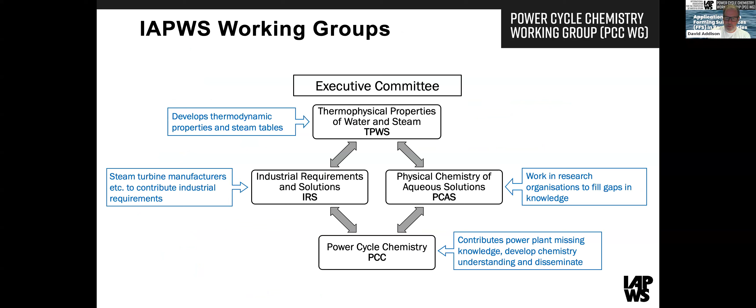IAPWS has an executive committee, and then there are four working group parts: physical properties of water and steam, which is where steam tables have come from; industrial requirements and solutions, related more to steam turbines and industrial manufacturers; physical chemistry of aqueous solutions, which is the main research part of IAPWS; and then power cycle chemistry, the application and practical side, which is where this webinar has come from.

If you work in a power plant, you've used IAPWS, because that's where the steam tables came from. Every power plant in the world, any plant that uses steam, is anchored in IAPWS publications and information. For the Power Cycle Chemistry Group, if you go to the IAPWS website, you can find a description of PCC.

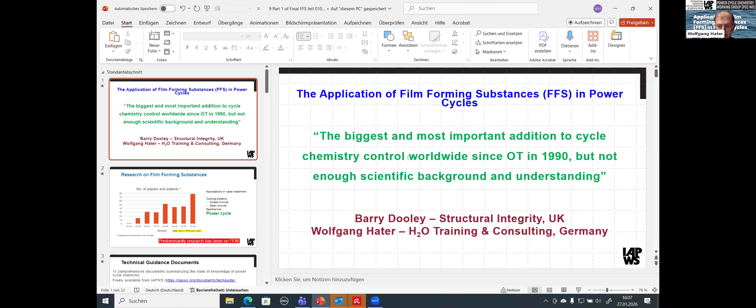Welcome also from my side to our webinar on the application of film-forming substances in power cycles. Barry and I, when we prepared this webinar, agreed upon the position that the film-forming amine technology, or more generally the film-forming substance technology, is the most important addition to cycle chemistry in many years.

But we also agree that there is a lack of scientific background and understanding. So the practical application is already, for some years, ahead of the science. Is this a new technology? No. The first papers or patents were published already back in the 1940s, and since then a lot of know-how has been developed that is officially available.

There are several applications in water treatment - cooling systems, geothermal, and what is the subject of today, power cycle chemistry. There's one point which is a little bit difficult: there's hardly any publication or scientific paper on the non-disclosed film-forming substances.

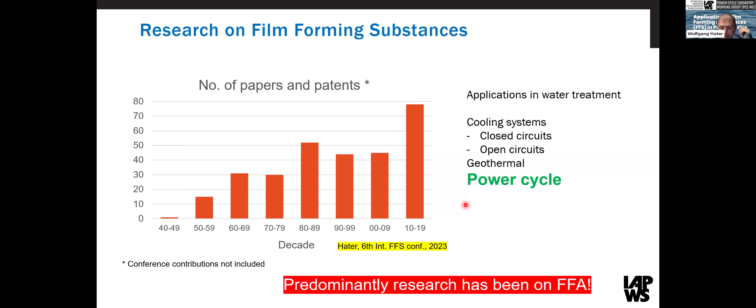So if you want a comprehensive view and summary of the knowledge about film-forming substances and their application in power cycle chemistry, I can only recommend you go to the IAPWS homepage and download the two international technical guidance documents on the application of film-forming substances, either in fossil combined cycle and biomass power plants, or in industrial plants. They give you an excellent overview of the technology, a comprehensive literature list, and guide you through all the questions you have to ask.

I would also like to mention that IAPWS is developing a certified research need document that will be published soon. The intention is to make a list of scientific gaps that should be closed for both FFA and FFP.

In recent years there has been a tremendous amount of activity dealing with film-forming substances - numerous plant assessments, various case studies reported, and application instances worldwide. Importantly, there have been 7 international conferences dealing only with film-forming substances, showing the general interest in this technology.

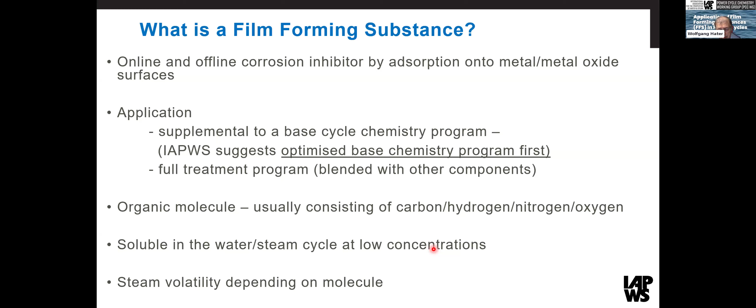When we originally started working on the TGDs, we had a big mess of names - this name, then film-forming amine, polyamine, fatty amine, surface active agent, and so on. So the IAPWS decided to introduce a nomenclature which is now getting more and more internationally accepted because it creates clarity, so we now know what we are talking about. There was an important distinction between the molecule itself and the commercial product that you apply in your plant.

Of course, the commercial product - one part of it is the film-forming substance. This is differentiated between film-forming amines, which are three very well-known molecules that are disclosed and where the properties are publicly available, and non-disclosed molecules, which we call film-forming products.

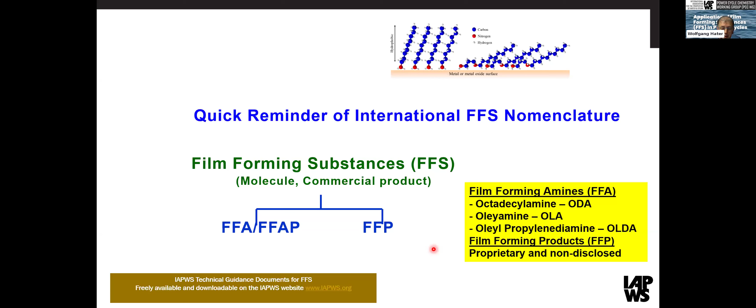If we look at the experience gained in the last decades on application in the power cycle, we find significant benefits provided by application of a film-forming substance. I have selected 5 key points that are repeatedly reported, which I will show you later in more detail. Almost all of these effects will improve the economics in the water steam cycle.

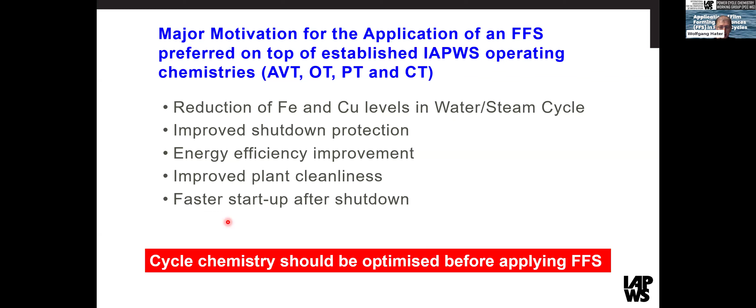For example, it has been shown that after application of an FFS into the water steam cycle, it was easier and faster to achieve the steam quality necessary to start the turbine running. And of course, if you can start the turbine running earlier, you can make more money. But I would like to go into more detail in the next slides.

Reduction of iron and copper levels. Here you can see an example of iron data from a combined cycle gas turbine plant. This plant is operating in heavy cycling mode and was exceeding the recommendations of the IAPWS guidance by far. So this plant was operating in a traditional way with AVTO plus phosphate into the drums, except the high pressure drum.

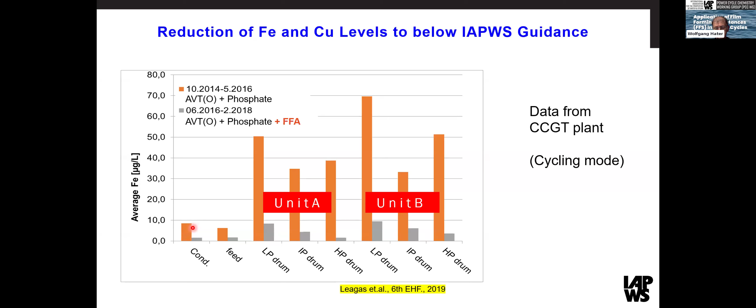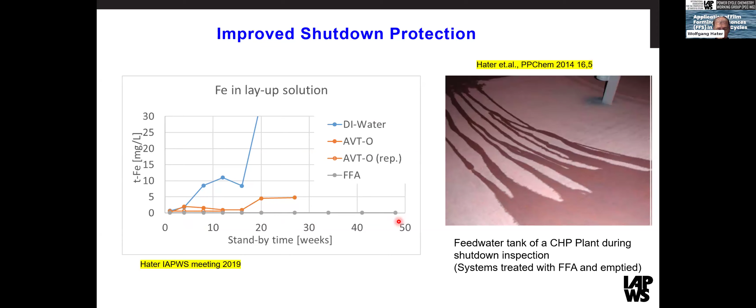Efficiency improvement. Efficiency improvement turns out to be a very high economic advantage. Two examples are shown here - there are more published in the literature that I don't have time to spend on. On the left-hand side, this graph shows data from several paper mills.

An FFS was added to the steam dryer to dry the wet paper, and the specific steam consumption before and after the start of FFS dosage is shown in this graph. The green bars show it before, and the other bar below, after the FFS. You can clearly see that the specific steam consumption - what you need to dry the paper - is reduced. This is about, on average, 3%, which is a significant saving for the plant.

On the right-hand side, you can see results of a study done at the Moscow Power Institute, where they found that with octadecylamine in the inlet turbine steam, the turbine efficiency could be improved by up to 2%, which is again a drastic economic advantage. I think this is, in light of the demand to reduce CO2 emissions, a very important effect that should be followed more closely.

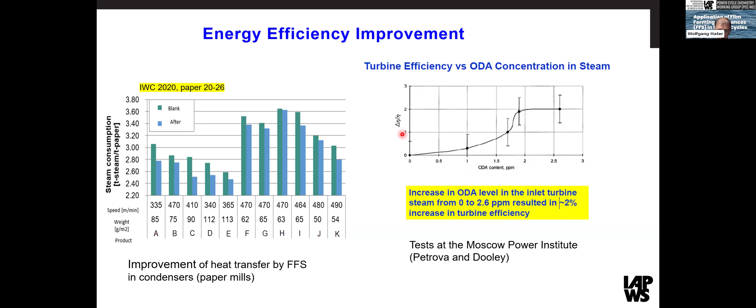When I'm participating in inspection of operators that first time open their plant after they have switched to an FFS treatment, I often get the remark, 'Oh, very clean,' or 'exceptionally clean.' Beforehand, I had to take out one bucket of debris on the drum. Now it is hardly one handful.

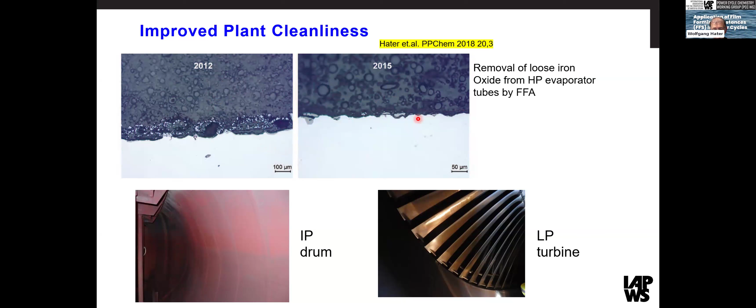This is, of course, a qualitative effect, but in the upper two graphs, we can see a quantitative effect. This graph shows two cross-sections from tubes of an HP evaporator. Until 2013, this evaporator was treated without FFA, and from 2013 up to when this sample was taken, two years, it was treated with FFA. You can see a marked difference because this loose iron oxide has vanished. So we can see a very significant cleaning effect that will improve the heat transfer, but also maybe even omit a chemical cleaning. About chemical cleaning, Barry will talk about more in detail in the second part.

Now, have a closer look at the chemistry. I start with the film-forming amines because there we exactly know what it is. So we have an amine functionality and a long carbon chain. There may be two amine groups or saturated or non-saturated carbon chain. What is common is the common opinion that the molecule attaches to the surface via the nitrogen atom, involving the electrons of the free electron pair.

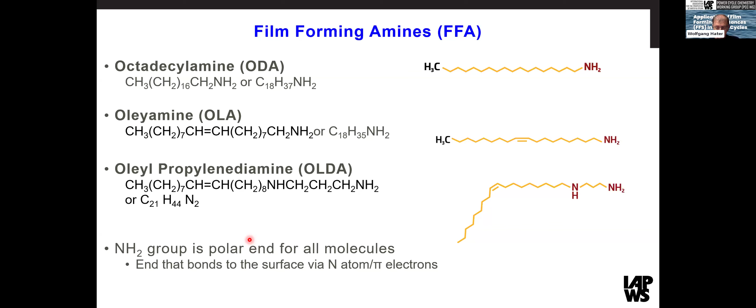For the film-forming substances, we looked into the literature, into the patents, where there were suggestions what you may use in the field. So we have taken some of these structures here on the page. You can see there is a hydrophilic part and a hydrophobic part. So the principle is similar, but the chemistry is of course different.

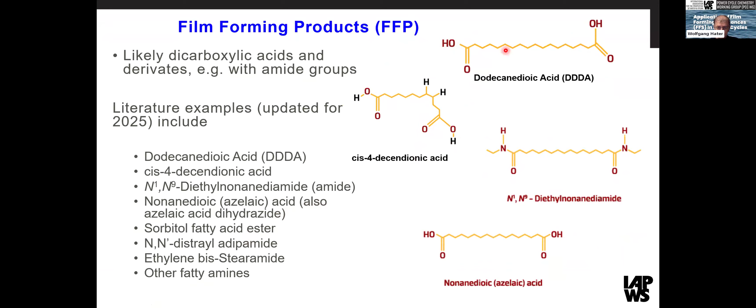There is a common mode of action, and that is the adsorption to the surface. The common knowledge is that the adsorption takes place via the hydrophilic part, in case of the filming amines via the amine section, in the case of the FFP via the hydrophilic part. And the hydrophobic part turns out into the water phase to create a hydrophobic surface. This hydrophobic film has been thought to protect the steel by decreasing the contact between water and metal. If you don't have any water, the corrosion will be reduced a lot. This is, of course, a simplified model. Today, our knowledge about the mechanisms is far more advanced, but it's still good to illustrate the effect.

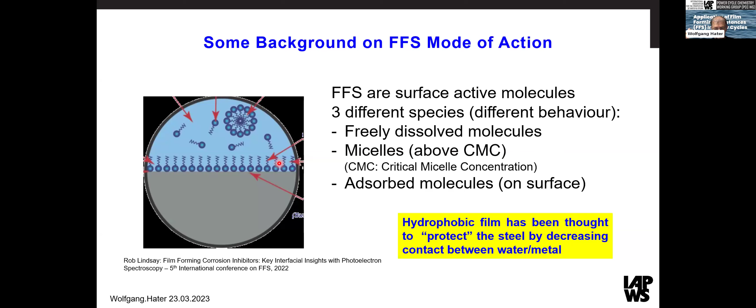What this also illustrates is that if you take a water sample and want to analyze the film-forming substance in the water, you don't get what is on the surface. That must be clear. And this is also why you never find in the water what you dose, because a part is attached to the surface.

Now, what is available on the market? There is a wide range of commercial products and suppliers. If we look at the products, as already mentioned, there are two major categories. One, these are the products that are added supplemental to the base chemistry program. They consist mainly of a filming component and can also have an emulsifier to create a storage stable blend.

And there's the other one, where you get a full cycle chemistry program. Besides the filming component, in these cases you have further additives like alkalizing agent. This can be alkalizing amines, sodium hydroxide, phosphates. They might contain dispersing agents or even reducing agents.

Now you can see why it is important that the operator knows the composition of the applied product. You must understand what the product is doing, what it can do and what it cannot do. Also, if you don't know the chemistry, you cannot judge if there are any risks related to the application.

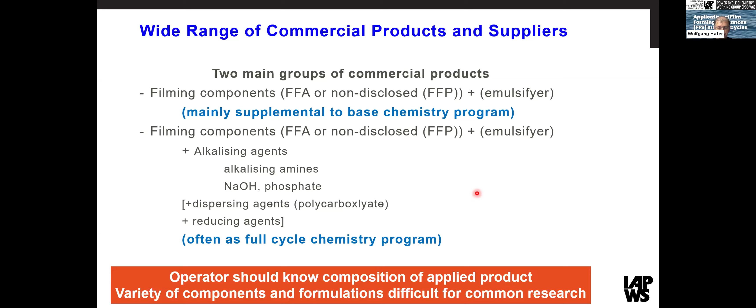So for the analytics, of course, as for all treatment programs, careful analytics is essential. For the film-forming amines, there are two basic systems, two basic methods. One is a cationic surfactant method, and the other one is the reaction with a selective dye. There are different dyes on the market, but Rose Bengal is the most important one.

These analytics can be done via grab samples. There are test kits on the market, and it can be done with photometrical determination using a standard spectrophotometer, and the reagents are commercially available. Also for the FFA, there is an automated method of analysis available based on the Rose Bengal method that has proven its worth already in the field.

Besides the direct measurement, you can indirectly conclude on the presence of the filmer in the water if you implement test specimens into the water cycle, for example in the sampling lines, and then remove the test specimen and are able to detect the filmer on this specimen later. But I will go into that in a little bit more detail. For the film-forming products, there are various vendor methods.

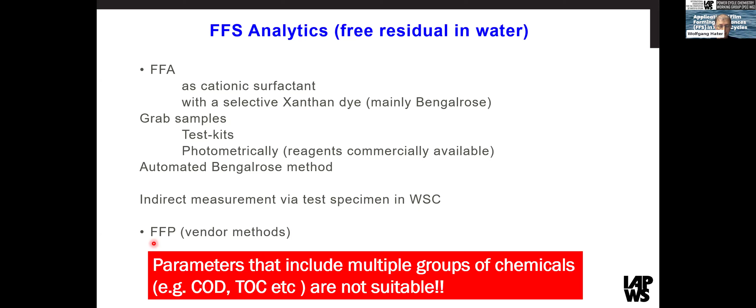So we have covered the analytics in the water. Now we go to analytics on the surfaces.

The most important test on the presence of filmer on the surface is hydrophobicity. You spray one or more droplets of water onto the surface, and if you have a nice round shape, it's hydrophobic. If it looks different, it is hydrophilic. In this case, it is assumed that film is present. There, it is not.

This is very commonly used. It's not standardized - everybody does it a little bit differently. But keep in mind, this is not specific for filmer. You can create a hydrophobic surface also with oil. And what has been understood now is that there are not only false positives, but also false negatives. Especially if you have iron oxide on the surface, the interpretation of the droplet test can be very tricky and can lead to misleading results.

Another issue is that it tells you it's hydrophobic, but the level of corrosion protection is not really clear.

Besides this qualitative test, we now have a semi-quantitative test for the determination of film-forming amines on the surface. This can be done on-site. The principle is that you remove the film-forming amine from the surface with a solvent, transfer it into an aqueous solution, and inside that solution it is determined via the normal Bengalrose method or an adapted Bengalrose method, which is a good step forward.

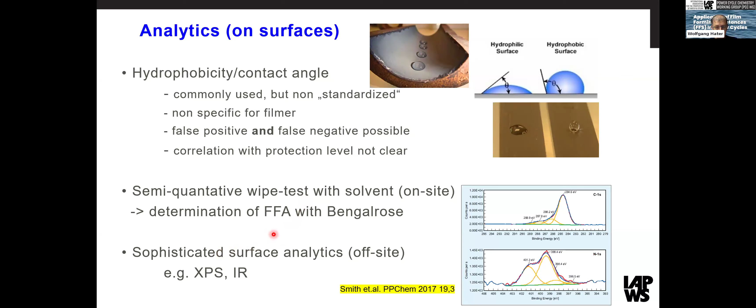Good. As I already mentioned, all filming molecules are organic. As a consequence, they face partial decomposition, especially in the hottest areas like the superheater and reheater. For the film-forming amines, this is well studied and understood, and the main decomposition products are ammonia and low molecular weight acids, more predominantly acetic acid and formic acid.

For the FFP molecules, I don't know of any scientific study published.

I already mentioned the property of filming amines that they have a cleaning effect. I showed you that a porous iron oxide layer has been removed slowly, which is of course a positive effect. But there have also been oppositional effects observed when using these molecules. This is related to the buzzword 'gunk balls' - deposits that look a little bit like balls. I took this picture from a paper from 2012.

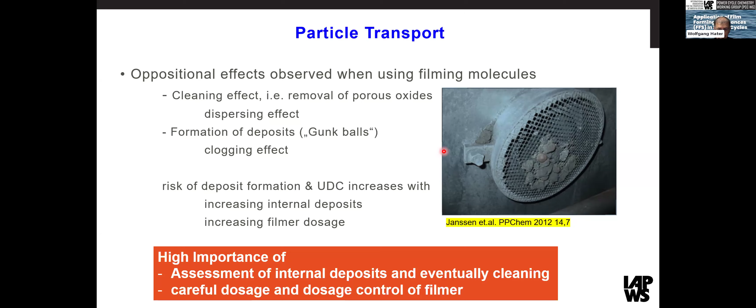At the same time, a careful dosage and careful dosage control is mandatory. So, how to dose and how to monitor?

Preferably, the film-forming substances are dosed automatically into the condensate or into the feed water pump inlet, and the amount should be controlled by the feed water or condensate flow. Keep in mind that in case of non-volatile components in the product, the dosage must be after the branch of the spray water to avoid any pollution with phosphate or sodium of the turbine.

Generally, a single dosing point is enough to cover the whole plant. Keep in mind, the film-forming substances are steam volatile. But in special cases, a second dosing point can be advantageous - for example, if you want to create the film in an air-cooled condenser, which has a tremendous amount of surface.

It is known that some film-forming products can attack plastic materials. For example, film-forming amines attack Viton. As a consequence, you should check with the vendor the material compatibility and, if necessary, exchange the materials. This is valid only for parts that come into contact with the concentrates.

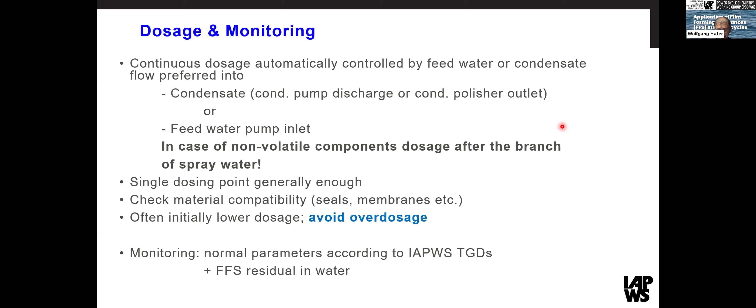For monitoring, of course, you should measure the FFS residual in water, but additionally to the normal parameters according to the TGDs of the IAPWS, like pH, conductivity, and so on.

So if you now want to start an FFS application, what should you do? Chapter 8 of the two mentioned TGDs gives detailed recommendations. I only repeat the most important parts. You should do an assessment of your plant status and analyze possible risks. For that, you must understand what is inside the FFS commercial product, otherwise you cannot judge it.

Furthermore, you should define targets for what you want to improve. Do you want to reduce the metal concentration in the water? Do you want a faster startup? Do you want to improve plant protection? And define ways to measure this, how to determine the degree of this effect.

Don't forget to train the people, because film-forming substances behave differently from ammonia, for example, especially for the people who do the analytics. They should know how to take a sample, how to do the analytics. It's not black magic, but you can make a lot of mistakes.

Don't forget that you should do a baseline determination of the important parameters for the current cycle chemistry. Whatever you have defined for targets, you should measure this data for the current cycle chemistry, and after the changeover to an FFS treatment, validate the target achievement. This you can do only if you measure the data again, and then assess the plant status. If you don't do a baseline determination, how can you evaluate whether it's a success?

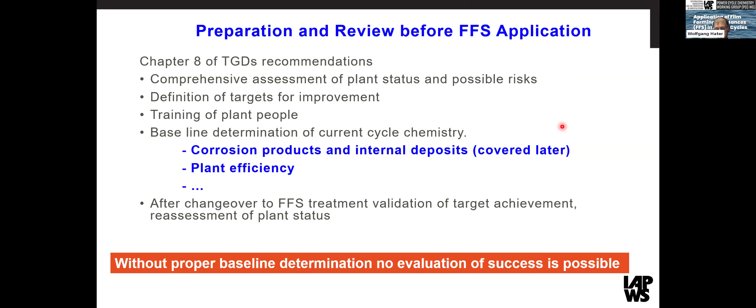This is not only valid if you want to start an FFS application, but in case of any change of treatment program, you should do that.

Now let's imagine you have done a treatment with an FFS for a certain time and you're not happy, or due to some reasons you want to change. Can we change between different FFS products?

Let's first look at an FFS dosage that is supplemental to a base chemistry program like AVT-O or whatever. In this case, it's easy. You stop the dosage of the current FFS, you clean the dosing system, which is very important, you operate the system a couple of days without FFS dosage, and then you can start the dosage of the new FFS. The protective layer will be reassembled over time. I would not at all recommend mixing the commercial products in the storage vessel. This will normally create a lot of trouble and mess.

In case you use an FFS product that provides full cycle chemistry, it is not so easy, and you have to do a case-to-case evaluation of how to do it.

Thank you, Wolfgang. Can you unshare, please? Didn't I unshare? Okay, I'll have a look. Oh, what happened? Go ahead, I stopped sharing, no? Okay. All right, I'll see if I can share. Let's see. Good, because now I see your face. Okay, and so this one here. This should be your last slide. This is my last one, yes? Okay, so I will switch off now my audio. Okay, thank you. And just need to get rid of this audio. Okay, there we go, and so let's proceed here.

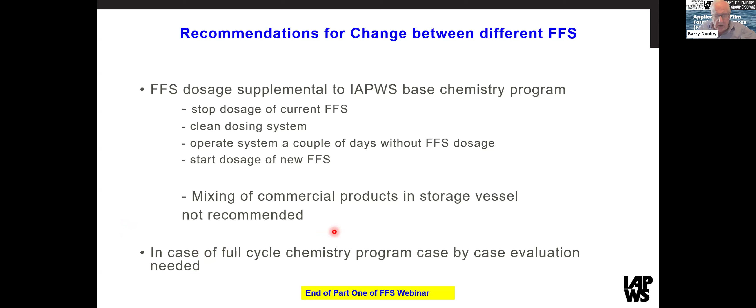So Wolfgang's left me a few minutes here to present this to you. From Wolfgang's part one, you've seen the indication of the format of the IAPWS TGD and some of the known science, and most importantly, because this part will be different, he's shown you some very good applications. I'm sure we'll see in the question period that all applications are not the same—some are good and some are bad. I want to show you in this second half some of the applications we've seen that have resulted in failure.

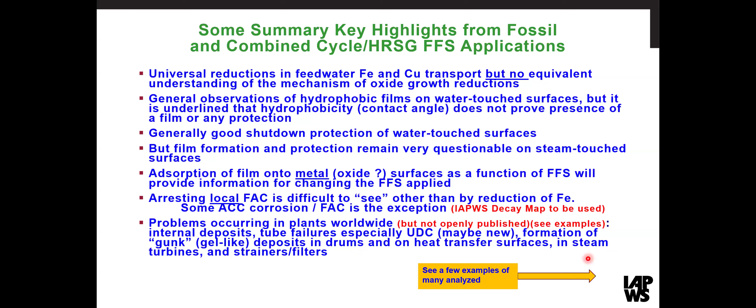So here's a few examples of the many that we've analyzed. This was one of the first ones we saw over 10 years ago. We didn't quite know what was happening at the time.

This was tube failures in an HP evaporator due to heavy deposits. You can see the details of the unit here, the internal surfaces with very heavy deposits, and the failures that took place. When we make a cross section here, you see that there's a very thick and dense corrosion product layer.

When we cross section it, you can see right here that this is what we call an under deposit corrosion mechanism, and the scale here is in typical multi-laminated morphology, meaning it's very fast. But the interesting thing when we see these in failure analysis units is that we don't see the material degradation. So after collecting these examples for over 10 years, I think this is a new HRSG tube failure mechanism that's taking place.

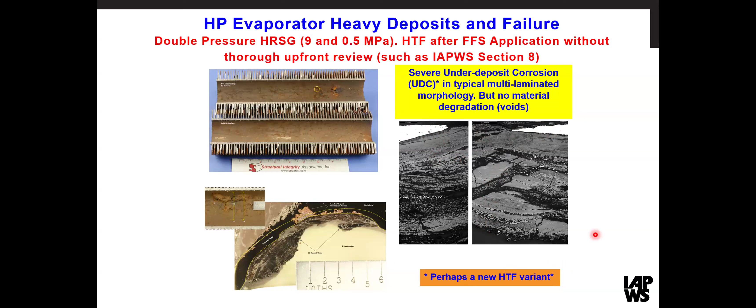We're in the initial process, thinking of making a few additions and changes to the TGD, and one of those would be to add clear direction as to when a film-forming substance can and cannot be added.

So here's an example. We would not like you to add a film-forming substance to this situation. Here's analysis that we did from internal surfaces. You'll see that the total loading here is very high, and when we look at the IAPWS deposit map, which I'll describe in some detail in a little while, that's right up here at the top of the red area.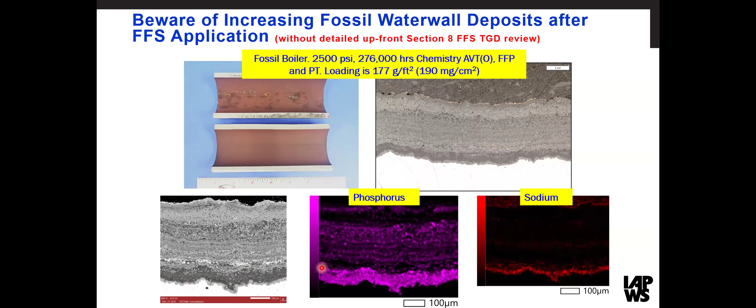You can see after the application of a film-forming substance, there's a large increase in the amount of deposit. And the most important thing the IAPWS deposit map indicates is that once you get this reaction product, which is this black layer at the base of the deposit, you want to be very careful about adding a film-forming substance, or you might end up with a situation like the one previously shown, or this one.

This was a failure that occurred in a triple pressure HRSG, and you can see here the under-deposit corrosion taking place. When we look at this metallographically, we find examples like this — you can see very clearly this very fast occurring rapid process of a multilaminated scale, and the same here. But again, we do see material degradation, which is normal in an under-deposit corrosion situation.

And so again, I think that this is a new tube failure mechanism.

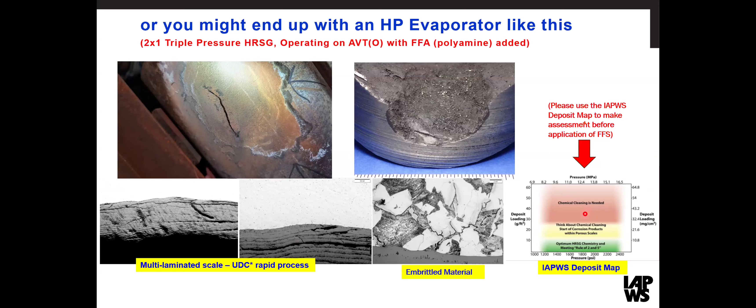It hasn't been quite worked out yet, but we're seeing too many examples of it now, and that relates to the deposit map which I'll talk about in a few minutes. The other thing Wolfgang mentioned was gunk deposits, and I'll show you that in the next slide. So we want to make sure that if you don't look at these internal deposits, you've got to be very careful of increasing HP evaporator deposits, which can go to high enough levels that can initiate under deposit corrosion.

So this was a detailed study that we did, and after 3 or 4 years we measured the internal deposits. They were still down here in the yellow area, not quite as harmful as in the red. But at this time, this organization decided to apply an FFP - you know what an FFP is now from Wolfgang's discussion. And 1 or 2 years later, this had increased the deposit level. The deposits had increased by up to 3 times. So you've got to be very careful of these deposits.

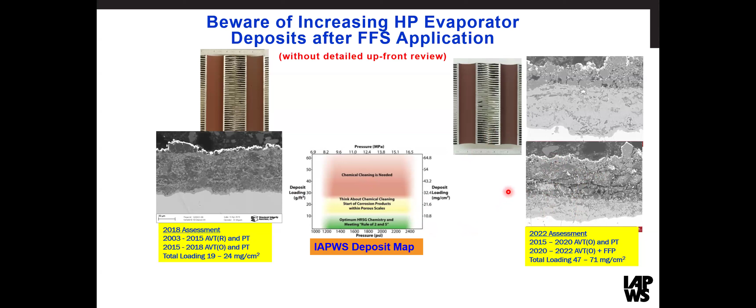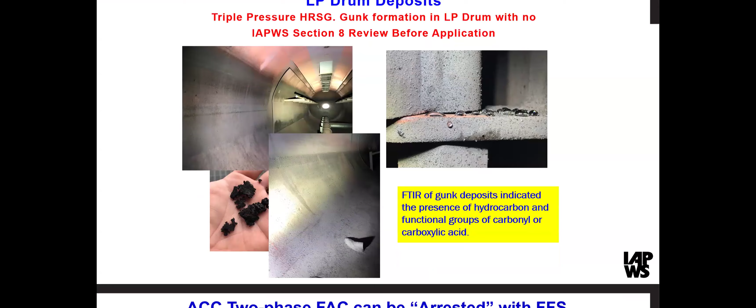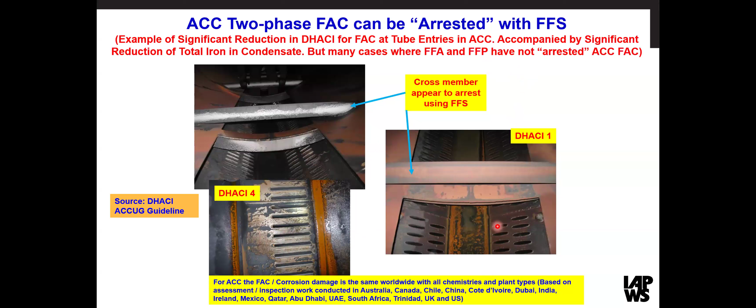And after using an FFP, all of those white FAC areas disappear, and the DHACI went down to the lowest level. So this is equivalent to having hundreds of ppb of iron coming into the condensate compared to less than 10 ppb of iron coming into the condensate.

So now I've shown you a couple of things in a short period of time. I don't have too long, but I've shown you enough to indicate that we have to be a little careful here. Wolfgang mentioned Section 8, I want to go into that in a little more detail. We covered that in the TGD documents, the FFS documents, but I want to show you the supplementary information that's needed that we didn't go into in too much detail.

These are involved with measuring total iron in steady load plants, measuring total iron in flexibly operating plants, and measuring the internal HP evaporator internal deposits. I'm going to talk a little bit about each one of these, starting with the first one.

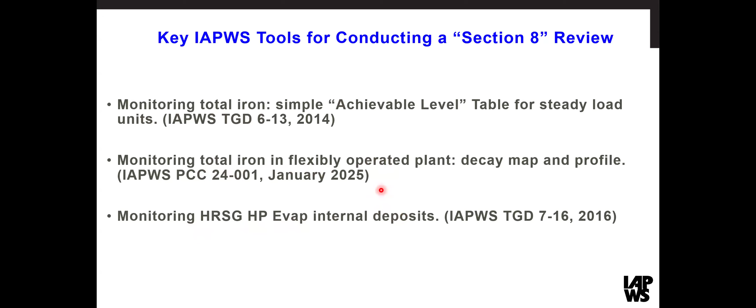That's this IAPWS TGD 6-13 that we developed in 2014. This was the first document that IAPWS produced involved with sampling and analysis of corrosion products. It included what were non-suitable methods - they're given here, spectrophotometer in the lab or millipore filters, and that's because the detection limit is not good enough. You've got to have the detection limit to show that you've got an improvement. In the document, there's suitable methods for sampling, where to sample and how to sample, and what techniques can achieve this detection limit.

The next slide just shows the rather famous table of achievable iron levels when the chemistry is optimized in the various plants. We emphasize that this is for steady base loaded plants. For instance, if you have a feedwater system operating on AVT, achievable level of iron is less than 2 ppb. If you go to oxygenated treatment, it drops down to less than 1. In the drums, gives you the values here. In air-cooled condensers in the condensate, less than 10 ppb, but if you have a filter - we like 5 micron absolute filters - it should be able to go to 5.

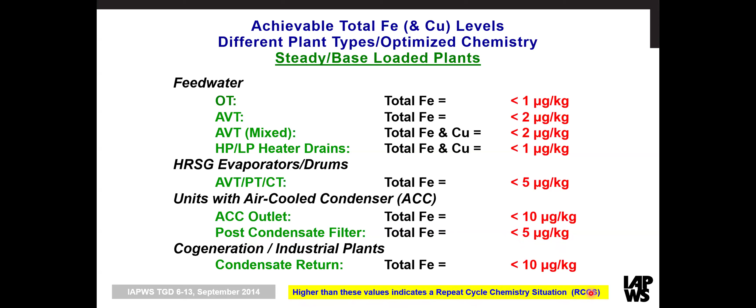So what we indicate now is that if you have higher than these values, it indicates that you have a repeat cycle chemistry situation, and you've got to be careful about applying a film forming substance.

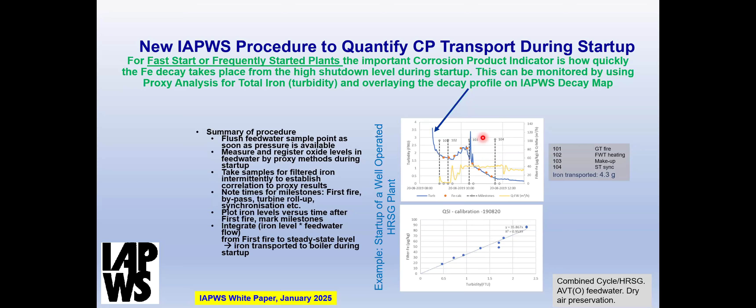So for this to be a useful technique, IAPWS had to develop a template to judge if the chemistry is okay, is optimized or not. If the profile comes in the green area, that means the chemistry is optimum, and you've got optimum shutdown chemistry procedures, whereas red is the opposite, with poor operational and poor shutdown chemistries. So what I've done here is superimpose that decay profile where it's in the green, indicating this.

This is for a well-operated unit, for operating chemistry and for shutdown chemistry. The guidance documents, the white paper, give you every indication of how you can make an improvement. But I want to emphasize that it's not the numbers that matter, it's where this profile is. For instance, with film-forming substances, you might have a profile that's up in the red to start with, and when you change to an FFS, you'd hope it would move down into the green area. The overall emphasis is that you want to see this profile moving towards the green, indicating the chemistry is improving.

I hope you realize this is a very powerful tool. It's one of the most exciting cycle chemistry tools I've been involved with over the last 30 years of managing cycle chemistry. The goal is to improve the chemistry and the shutdown procedures, and you now have a tool to monitor that by watching where this profile goes.

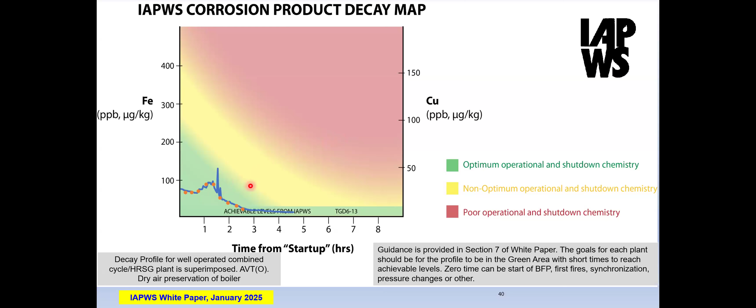I've included on the next slide a couple of examples that aren't so good, that need some improvement, in terms of operation and shutdown. You can see the units given here in the grey boxes. In this case the decay profile is up in the red area, and it lasted for 4 or 5 hours, indicating that a lot of iron is going into the boiler area. In this case, not quite as high into the red, but lasting for a long period of time.

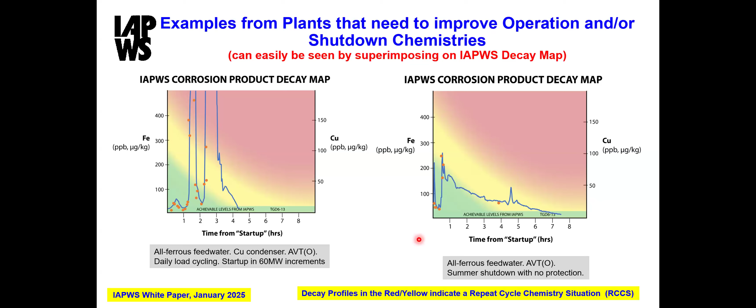So what we're indicating is that decay profiles in the red or yellow indicate a repeat cycle chemistry situation, and indicate you need to be careful about adding an FFS to make sure you know about that, or you could end up with one of those failure situations I showed you before.

The third and final part of the Section 8 review is to make sure you know what the internal deposits are on your evaporator surfaces. This is an HRSG operating with optimum HRSG treatment, meaning it's operating with an IAPWS cycle chemistry treatment. It's got a nice red color, which is what you want to see, and a very low level of deposits.

The two most important things are: one, these deposits are very low, as you can see, and two, there is no concentration reaction taking place at the base of this scale. You can see the deposited magnetite crystals on the surface here. There's no dark reaction products along the surface like I showed you before.

Contrast that with this situation, which is an HRSG operating with non-optimum chemistry treatment. You can see the color of the HP evaporator is rather different than the nice red color you want, but also the overall deposit and corrosion products are much higher, and there is some indication of reaction products on the inside. You do not want to see those.

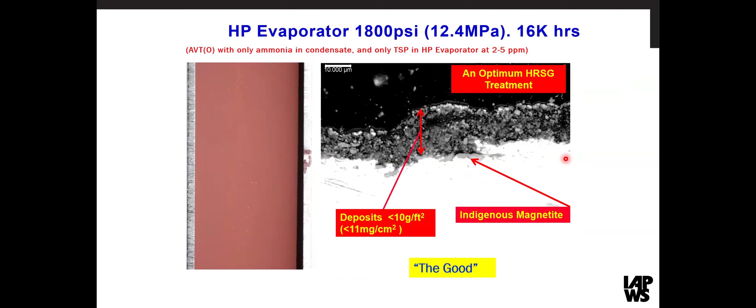In the former case, we would have no problem adding a film forming substance. In this one, you need to be very careful, or else you'll end up with a situation like I've shown you.

Many of you will be familiar with this, the IAPWS deposition map for HRSG HP evaporators, which we developed some time ago. This has now been verified by over 150 units worldwide to make sure it's providing the correct information.

So just to indicate again, if your deposit level, when you take the sample out, comes out in this green area, IAPWS would suggest it's okay to add a film forming substance. If it's in the yellow or the top of the yellow, you need to look at those deposits to see if there are any reaction products, in other words, to see if the deposits are thick enough to allow concentration to take place. And if it's in the red area, particularly right at the top of the red area, IAPWS will suggest not to add a film forming substance. So these are the three tools.

And again, if you have deposits in the red area, these are considered a repeat cycle chemistry situation. Don't apply a film forming substance unless you want to end up with the problems that I just showed you.

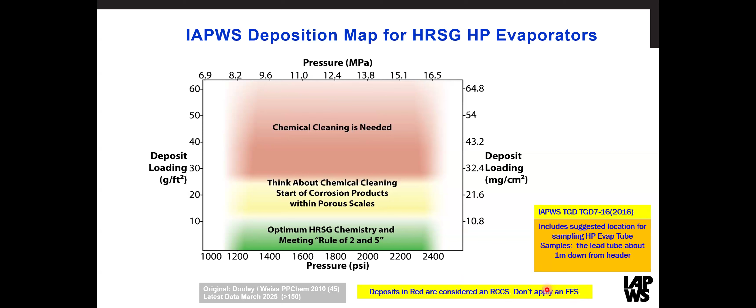So just want to finish off here with a couple of research items. As IAPWS and us individually have developed the TGDs, which were explained nicely by Wolfgang, we've also conducted many assessed plants. I've probably done over 200 plants operating with film-forming substances.

We've identified from these a list of the major deficiencies and items that still need research. Unfortunately, I don't have time to go through all of these today, but I just want to mention what we consider to be the most important, and that's the effect of film-forming substances on the growth mechanisms of the oxides that grow on these surfaces in water and steam. And this is the major current deficiency.

We've challenged the world 3 years ago now to come back for any of the suppliers or operators or anybody to come and provide some indication. We have yet to receive anything that's reliable. And so this is one of the major things that needs to be done.

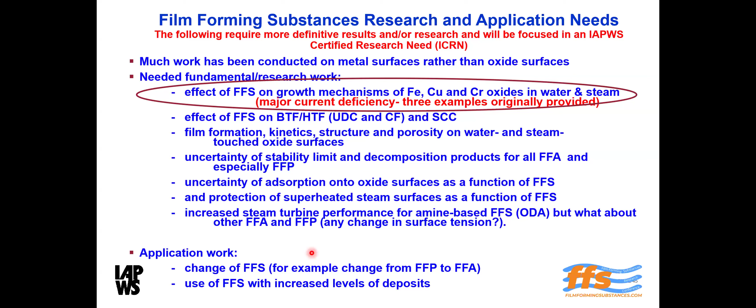For example, the change from one FFS to another, not necessarily from FFP to FFA, but vice versa. This is probably one of the major questions that I'm getting asked all the time now, of how this can be done. And so these are the research items, and we have put together a draft of an ICRN.

This is an IAPWS certified research need. This is a document that describes what research is needed to address these film-forming substance questions. Currently, it's in review by the IAPWS international members, and we hope that it'll be published in 2026, allowing operators and researchers and university research people to do the research on the right topics.

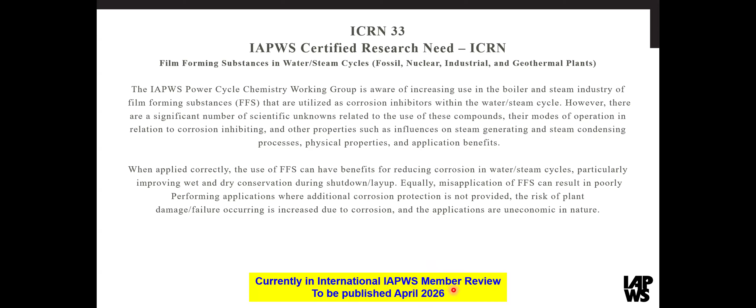So just got a few concluding remarks for us here, in that we feel that we have a well-established and understood chemistries for more than 30 years after very large amounts of research. And that's how all of these chemistries were developed. These are the normal chemistries that everybody deals with, plus a very good, almost total understanding of the phase transition zone in the steam turbine.

Whereas film-forming substances have been used in some concentration over the last 15 years without the same level of detailed basic understanding. So no understanding of how an FFA or an FFP changes the growth of the oxide. And are there any fundamental differences between the results between an FFA and an FFP? I personally don't think so.

I've done quite a few studies now. It's very difficult. Maybe the studies haven't been done in a concentrated enough way, but this is one of the things that has to be addressed.

Big question is, how do we change from one film-forming substance to another? We can't do that unless we understand the answer to these questions that I've raised here about how an FFS affects the growth of the oxide. But in the interim, obviously, we've got to move ahead, as Wolfgang has indicated.

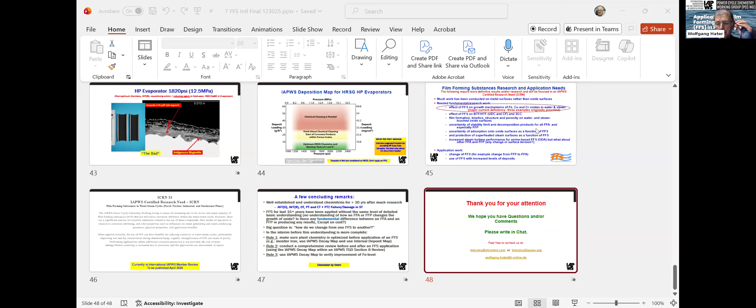Because if you have an iron oxide layer, it consumes a lot of the film. So, to give you an idea, it can take 3 months. That's normal, that you can see something really moving. You don't expect an effect that you start today and have the effect the next day. That would probably be

an error in detection. I would just say it would depend also on how optimized the starting chemistry is, and there's probably a comment from IAPWS that if your base chemistry isn't as optimized as possible, applying a filmer may or may not be effective in those cases. So if your base chemistry is way off the mark, that's often a problem as well.

So a complex question. We don't want to spend too long on one topic, but we see this many times, with FFP and FFA, and it relates to exactly what I've said, that organizations haven't done the upfront analysis properly. I can't make it any clearer than that. And if the plant is not operated according to the guidelines, yes, this is not black magic. It's not medicine for everything.